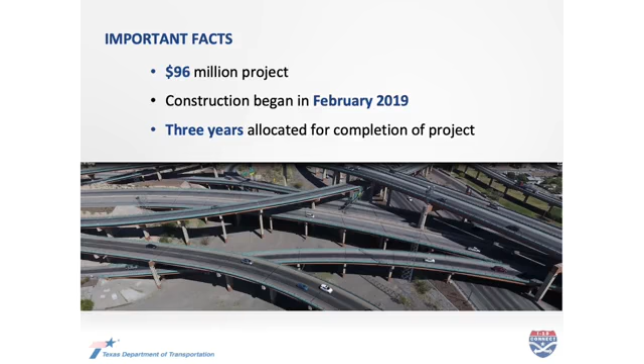Just a reminder about what the project is designed to do: it's designed to create more connections between I-10 and Loop 375 at Center City. So as you see right now, we're flying high above the Spaghetti Bowl. Everything you see in blue on the diagram is a new ramp, either a replacement of an existing one or altogether new. The big change, as many motorists have encountered over the past several weeks, is if you're going to make that decision to go to Juarez, you now have to make that decision at the Spaghetti Bowl. When the project is complete, all traffic, whether coming from I-10 East, I-10 West, or US 54, will make that Juarez decision there at the Spaghetti Bowl.

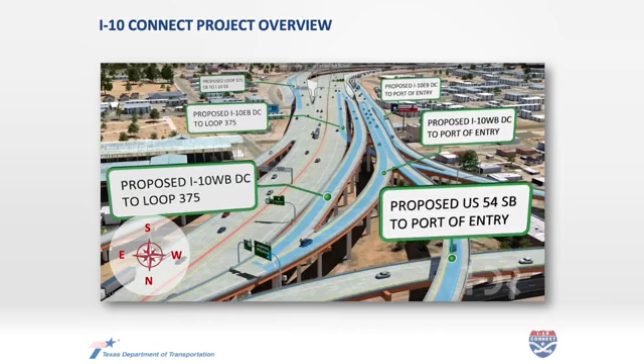That's because of some changes further down the road, which we'll show you in the next slide, at the intersection of Interstate 110, that short freeway spur that leads to the Bridge of the Americas, and Paisano Drive.

You can see I-110 flowing under Paisano. For years and years, you've been able to take Paisano and then make that last-minute turn to get into the bridge if you wanted to. That turn has been eliminated. All traffic coming into the Bridge of the Americas will have to do it via Interstate 110, that freeway spur leading from I-10 down to the Bridge of the Americas. So a big change in the way we get to the bridge from the way many of us have been doing it for years and years.

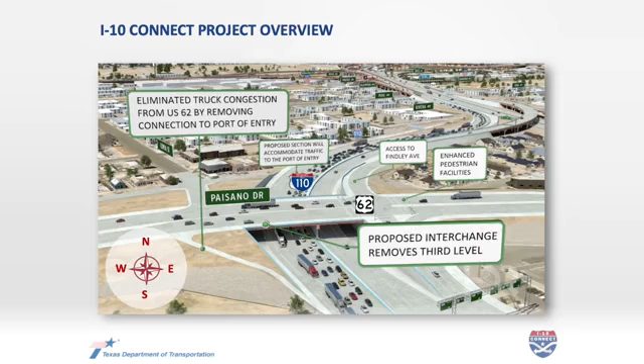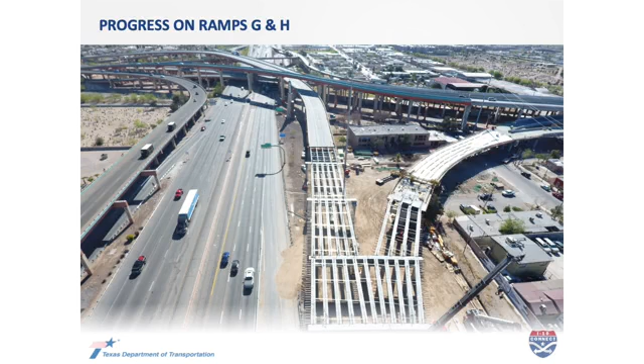That is, of course, a computer rendering, but computer renderings are good - real photos of real progress are even better. So let's take a look at the next slide. We have some pictures from the field of ramps G and H, just to get you acclimated as to where you are. East is towards the top of the screen, downtown; west to the bottom; Juarez off to the right; Northeast El Paso off to the left side of the screen.

As you can see there, those ramps that many of us have taken to get to northbound US 54 from eastbound I-10 have been closed for quite some time, but you can see real progress being made on reconstructing and reconfiguring those ramps. We're told within the next couple of months, probably by July, these ramps will be completed and reopened, giving you direct access from eastbound I-10 to northbound US 54.

This is a brand new part of this project: from eastbound I-10 to southbound US 54, and then on to Loop 375. There at the center of the right-hand side of the screen, that's the eastbound I-10 direct-to-Juarez connection. So again, the way we've cast it is putting more noodles in the spaghetti bowl, but each of those noodles means better access to get where you're going.

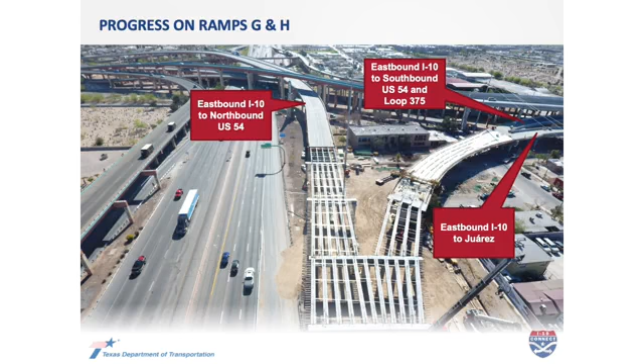That's a really good overhead view. We have some shots down on the ground of those bridge girders being installed there at ramps G and H. As you can see, it is a monumental task - it takes a lot of time, a lot of effort, a lot of human power, and a lot of machine power to get those concrete bridge girders up in place.

Once those bridge girders are in place, work begins on actually creating the bridge deck, the driving surface. So as you can see, there is progress out there, but of course it is many, many steps before those individual pieces of the project can be completed.

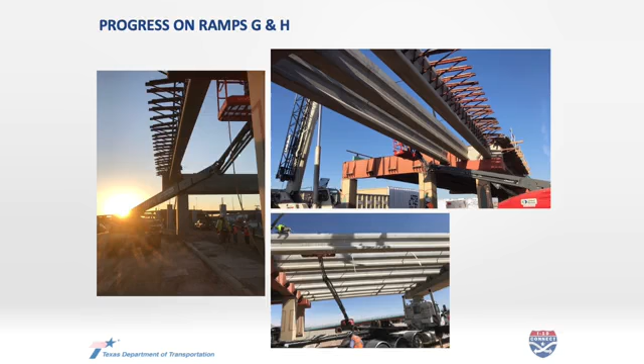So that's been a long-term closure, but now we want to dive into some of the short-term closures we have coming up all around the project over the next couple of weeks.

This is a closure taking place on northbound US 54. Whether you're coming from eastbound Loop 375 or westbound Loop 375 along Border Highway, US 54 will be closed to you from Loop 375. So the detour - this is a really circuitous detour - is coming Sunday, May 9th, starting at 9 p.m., continuing to 5 a.m. the following morning. Let's say you're leaving downtown trying to get to the northeast and you're on Loop 375. The way you'll do it, and it's going to seem awfully out of the way, is continue on Loop 375 to Fonseca, turn around at Fonseca, take the US 54 exit, head north on US 54.

You'll have to stay on Gateway North, then get on I-10, head out to Trowbridge, turn around, come back on I-10, and then take US 54 heading off to the north. So really and truly, this is one of those cases where you can follow the marked detour, but probably your best bet, if you can avoid travel in this area on Sunday, May 9th beginning at 9 p.m., is to do so. Again, US 54 closed northbound there at Loop 375.

So that's a one-night closure on Sunday, May 9th. We'll go ahead to another closure - I apologize, I jumped ahead, we're going to talk about this closure. We do a lot of our closures at night, but this is daytime lane closures Monday, Tuesday, Wednesday, Thursday and Friday of next week, there on Alameda Avenue under US 54. Crews are going to be actually painting the newly constructed bridges there at that location.

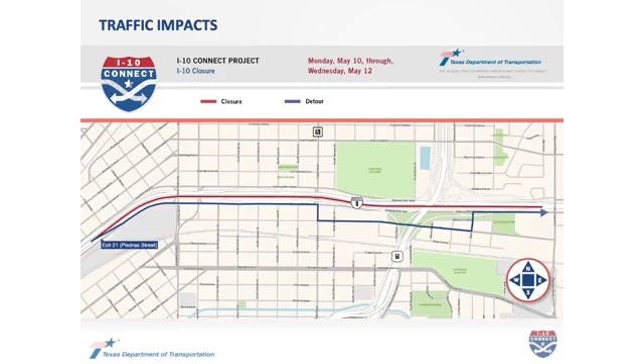We have another closure coming up now, moving back to 54. This one's only on Tuesday night, and it's one we've done several times before, related to some signage work. What you'll see there in red is the complete closure of US 54 southbound.

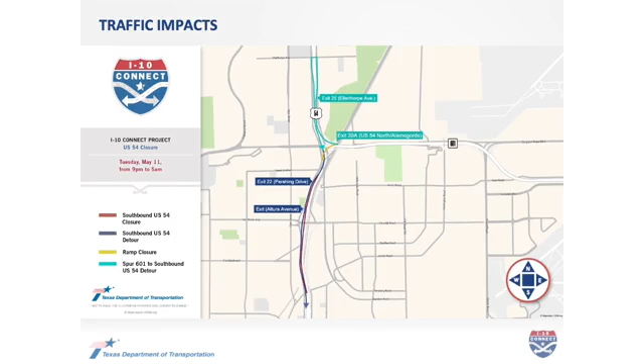So Tuesday night, there will be that closure down on I-10, also this closure on southbound US 54. If you're traveling in Central overnight on Tuesday night, know that you'll need to be thinking about how to avoid eastbound I-10 and how to avoid southbound US 54.

Now we can move on to Wednesday night. Remember there's also that closure this night on eastbound I-10 at Piedras, so keep that in mind. But this closure primarily affects US 54 and has what might be a surprising impact to the Juarez detour. There you see in red, that's just the collector distributor lanes on southbound US 54.

The local traffic lanes will be closed from 9 p.m. to 5 a.m. if you're heading southbound. So if you're just heading south on US 54 to get down to, say, Loop 375, no real issue for you. But don't forget, those collector distributor lanes, those local lanes, have been carrying Juarez detour traffic.

So let's talk about what your detour will be if you're heading to Juarez on Wednesday night, May 12th. Not going to be all that different, it's shown there in blue. Again, all traffic will have to take westbound Interstate 10 to northbound US 54.

We've been saying you just make that Pershing U-turn - not on Wednesday night. On Wednesday, you've got to go all the way up to Fred Wilson, do the turnaround there at exit 24A Fred Wilson, come southbound on US 54, and then you'll be able to follow the traditional detour by heading south on US 54 and keeping right to take that brand new flyover ramp down to the Bridge of the Americas.

As you know, if you travel in that area, that will not get you to westbound I-10. So westbound I-10 has a detour there shown in gold, which you'll have to take. Go east out to Trowbridge, U-turn at Trowbridge in order to go west on I-10.

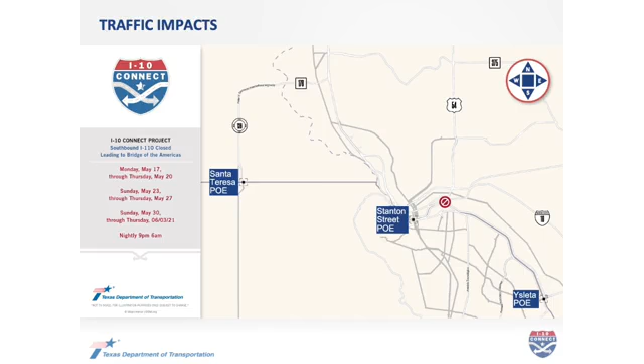As we mentioned, US Highway 62, Paisano Drive, has to be rebuilt over Interstate 110 immediately north of the Bridge of the Americas. Work will begin placing bridge girders on the side of Interstate 110, which would typically be the northbound side. Of course, northbound traffic is not flowing in its usual location, it's detoured by turning onto Paisano, so there's no real impact to traffic as those bridge girders get set.

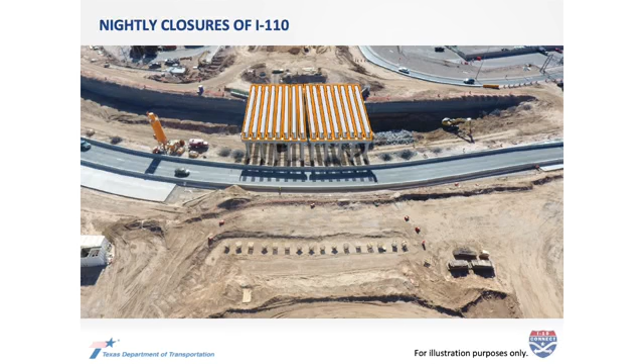But of course, that only gets the bridge about halfway across where it needs to go. So take a look at what happens next. We have more than a dozen of those big concrete bridge girders that have to be placed over Interstate 110. There is absolutely no safe way to do that with live traffic flowing underneath it. So the best the construction team can come up with to get this done safely and minimize impacts is to do those closures overnight.

So again, 3 weeks starting on May 17th of nightly closures of Interstate 110, so those bridge girders can be placed over the southbound lanes. Again, recognizing that this is incredibly impactful, not fun for anybody, but there's no other safe way to build this part of the project.

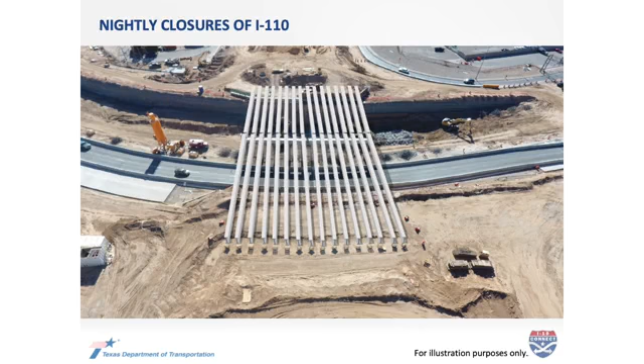So we've talked through a lot of closures taking place over the past 17 minutes or so. Some of them are happening for just 1 or 2 nights, some for many nights over a very long period of time. So really, we recommend the best way to stay fully up to date on all of those closures is to go ahead, as Jennifer was mentioning earlier, head to i10connectelpaso.com and sign up for text message alerts.

When we have one of these really big, high-impact closures, we'll go ahead and send a text message directly to you the day of the closure, maybe the day before. That way you'll have plenty of time to be prepared, and also be reminded right before it happens, like don't forget we have that big closure coming up on I-110 or Interstate 10. We'll make sure we give you an update as close to the event as possible.

Another thing we'd really encourage folks to do is, if you have any questions about the project, feel free to give us a call on our project hotline. You can reach us anytime at 855-463-1010. That's a good way if you're just getting some basic information, like 'I'm going out downtown Tuesday night, what's it going to be like when I try to head home on the east side?' We're more than happy to answer those questions, just that simple, just that drilled down. So if you have any questions, give us a call and we'll try to get those answers for you.

So I'll also remind you, if you have any questions about what we've covered, go ahead and drop us a note in the comments section related to this Facebook Live. We're more than happy to answer your questions before the meeting ends.

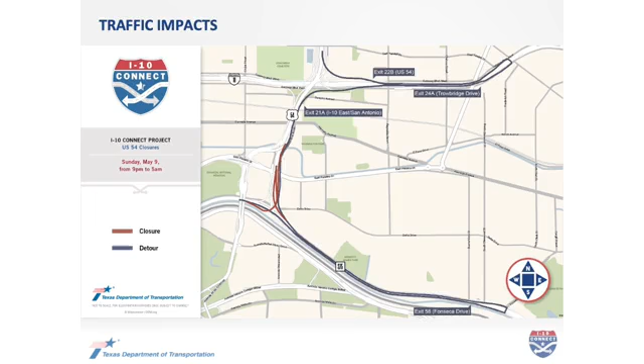So here's that map we were talking about. Sunday night, May 9th, the soonest one coming up, is the complete closure of US 54 northbound leaving Loop 375, a very circuitous detour. That's exactly the type of stuff we will remind you of in real time. Also, on Wednesday, May 12th, another really far-flung detour. So just make sure you're aware. We like to say that the best antidote to inconvenience is information, and we're happy to provide that.